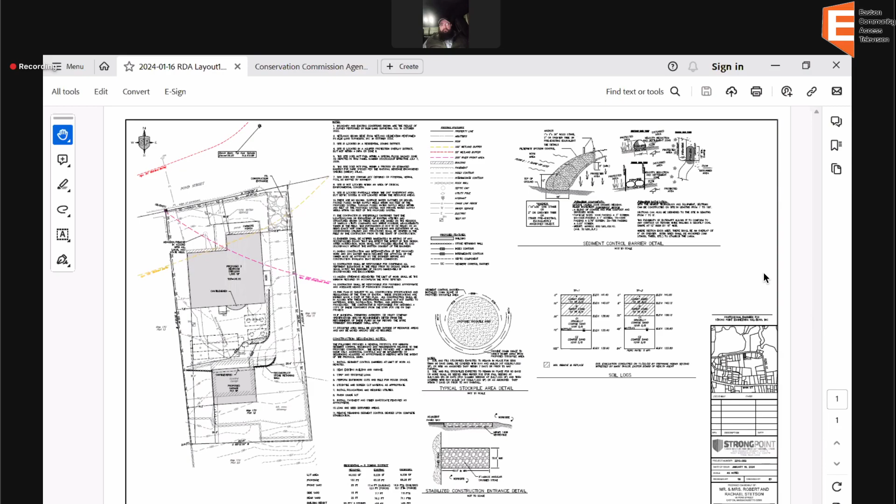While she's doing that, let me just say, for the record, Eric Dias, registered professional engineer, Strong Point Engineering, here tonight representing Robert and Rachel Stetson at 48 Pond Street. This is a pretty straightforward project. It is the tear down and rebuild of an existing single family dwelling on the site. The site is across the street from Shovel Shop Pond. And there is a small tributary stream to the east.

So we do fall within kind of the outer limits of the resource areas, but we are separated from the resource areas by an existing roadway. So we thought in this case, an RDA probably made the most sense here. The existing house will be torn down, foundation removed, new foundation installed, rebuilt in approximately the same footprint. Nothing really changes or gets closer in the front yard.

In the rear yard, in the existing condition, is a shallow cesspool that, as you know, we always try to eliminate because they don't do a great job of protecting groundwater. We are replacing that with a modernized system. I didn't want to say fully compliant because we do have some ZBA relief as far as setbacks to foundations and things like that. But it is a new tank, new pump chamber, new soil absorption field, everything, start to finish. So definitely a benefit there.

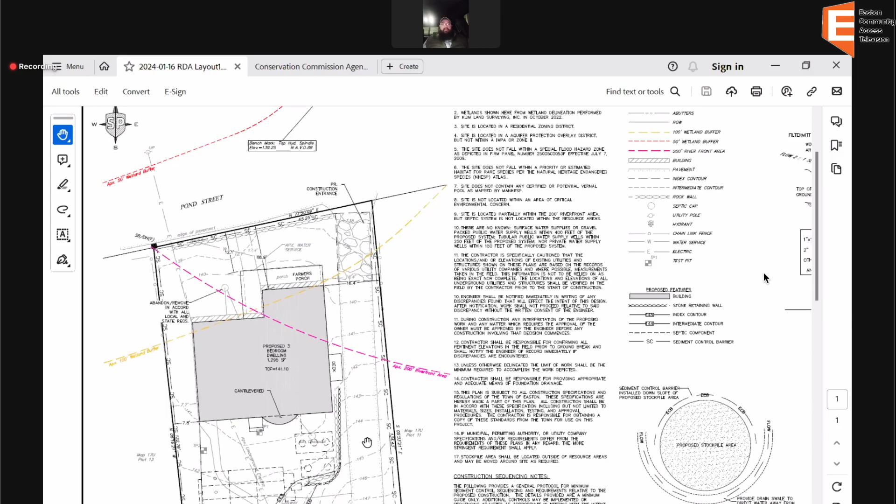Glad to expand any further, but I'll turn it over to you, Mr. Chair. Thank you, Eric. I think a lot of this makes sense.

Jen, any staff comment? My only comment is that the plan does need a surveyor's stamp on it. Yeah, unless - Yes, we can definitely take care of that. Okay, and just submit a finalized plan to the office. Thank you. Sure. Questions from members of the commission on this?

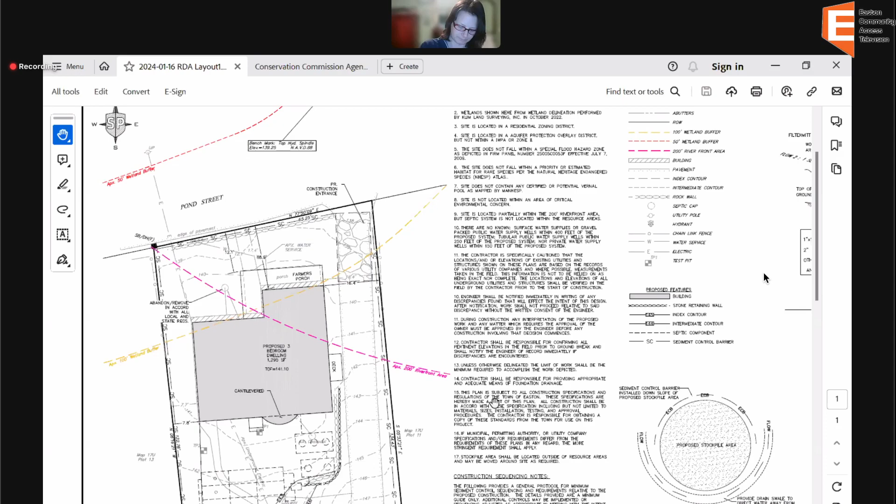I'm good. Eric, I assume you and your client would like to close? Yes, sir, please. Any public comment on 48 Pond Street?

Motion to close the public hearing on 48 Pond Street. Second.

Carol motion, Benson second, roll call vote. Benson, aye. Carol, aye. Spady, aye.

Motion to issue a request for determination of applicability, noting a negative five under the Wetland Protection Act, as well as a negative three and a negative two under the bylaw. Did I get that all, Jen? You did, perfect. Second. Carol motion, Spady second, roll call vote. Benson, aye. Carol, aye. Spady, aye.

Thank you. Thank you all very much. Appreciate it. Thank you.

I guess I'll just head back up here before we move away from public hearings.

Have the applicants for 23 Owl Ridge showed? Yes. Okay, so I'll recall 23 Owl Ridge Road, Lot 1. Notice of intent for the construction of a single-family home.

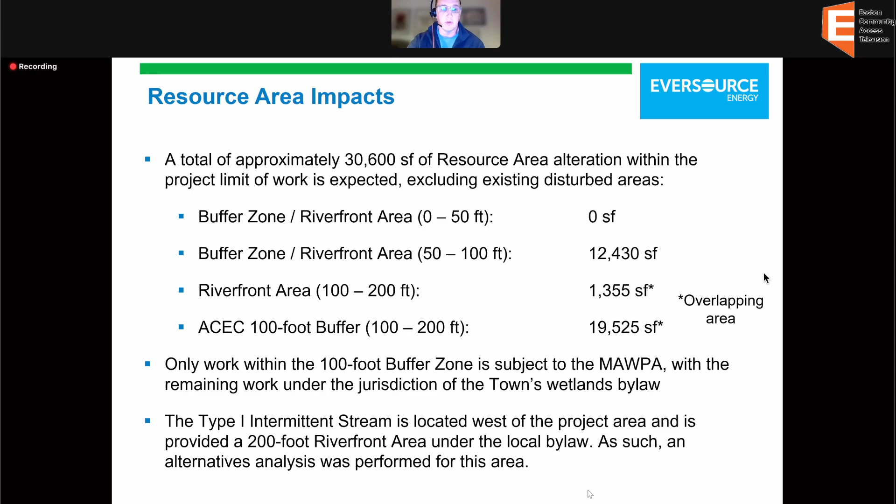This is a quick summary of the overall impacts for the 0 to 100 foot, the 100 to 200 foot, and then the total riverfront area impacts. Some of these impacts occur partially within cleared and grubbed areas and are not in addition to the existing clearing and grubbing impacts that we have.

So stormwater management, that's what I'm going to talk about next. This part of the project has probably the greatest measurable impact on the surrounding wetlands and buffer zones, just because of the improvements we're making as part of this project. The facility was constructed around 1971, at a time when nobody considered stormwater management. Being an industrial site, the facility lacks any sort of formal stormwater management system.

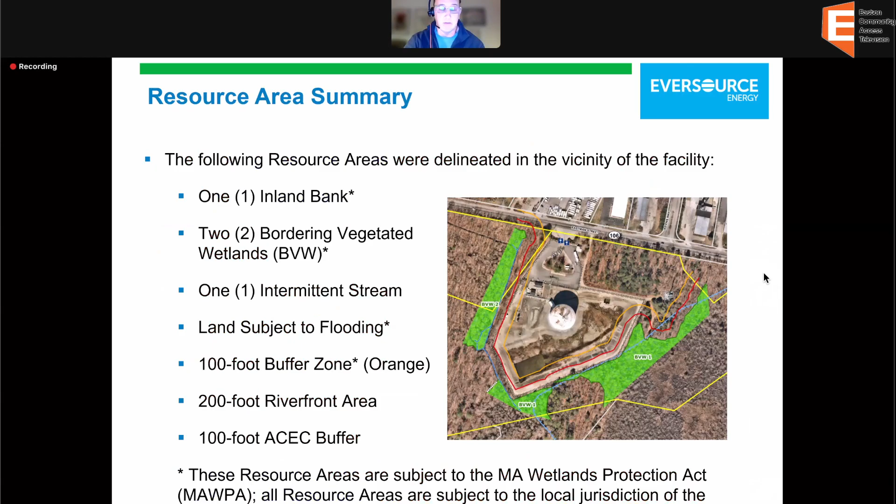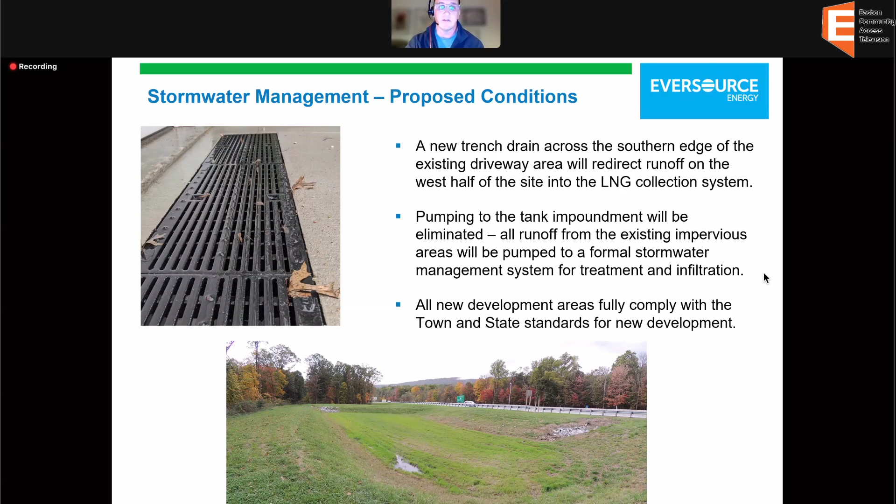The big upgrade for this site is basically the stormwater management improvements we're making. The first one being a new trench drain across the southern edge of the existing driveway area, along this edge here, in front of this building, all the way to the other collection point.

Collecting all of the runoff associated with this paved area - not just the runoff from our project, the electrical building, but all of this existing impervious area that's currently untreated and flows into the wetland. We're collecting it in a trench drain and sending it with the rest of this runoff into this concrete impoundment here.

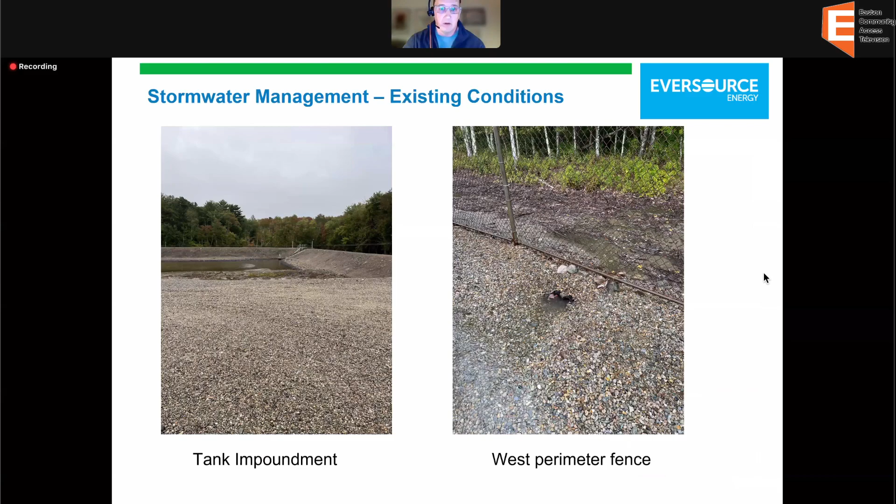The other big upgrade is we're not pumping that out anymore into this tank impoundment. We're no longer pumping any of the stormwater into this area here where it eventually migrates to the low point and gets pumped out.

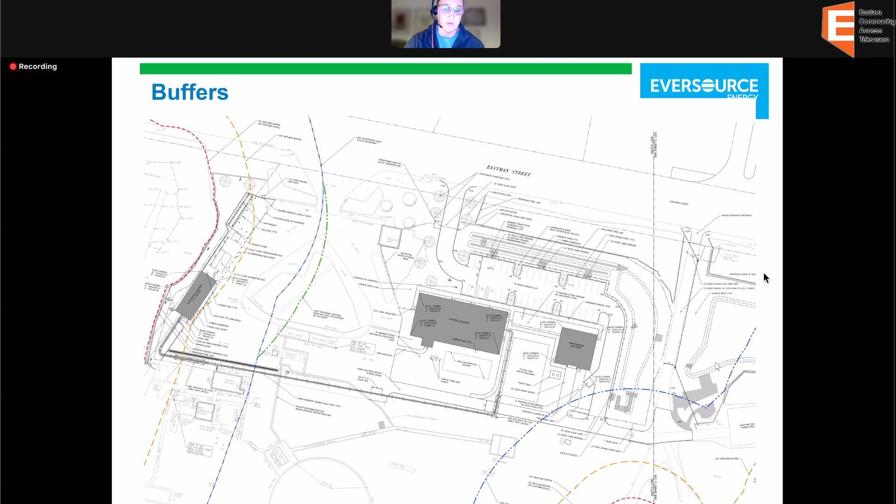We've provided 2 dedicated infiltration basins on the site - the bigger one you can kind of see here. So rather than pump untreated stormwater into the tank impoundment, we're taking that stormwater and pumping it into sediment forebays for pretreatment, then into the infiltration basin for infiltration and treatment. We're actually holding back the 100-year storm in that basin itself.

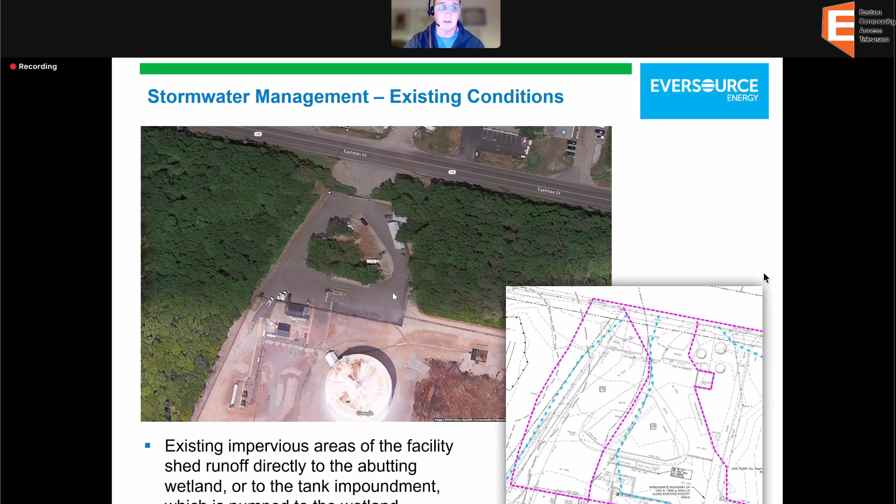So there's no discharges of untreated stormwater going into the wetlands anymore, which is a big upgrade, especially for an industrial site like this. Some numbers real quick: you can see for cubic feet per second, a 49% reduction for the 2-year storm, 45% reduction for the 10-year, and 42% reduction for the 100-year. So that's significant reductions in discharges.

Again, this is just that western half of the site where I was talking about that untreated stormwater - 49% no longer being sent to that area under the 2-year storm.

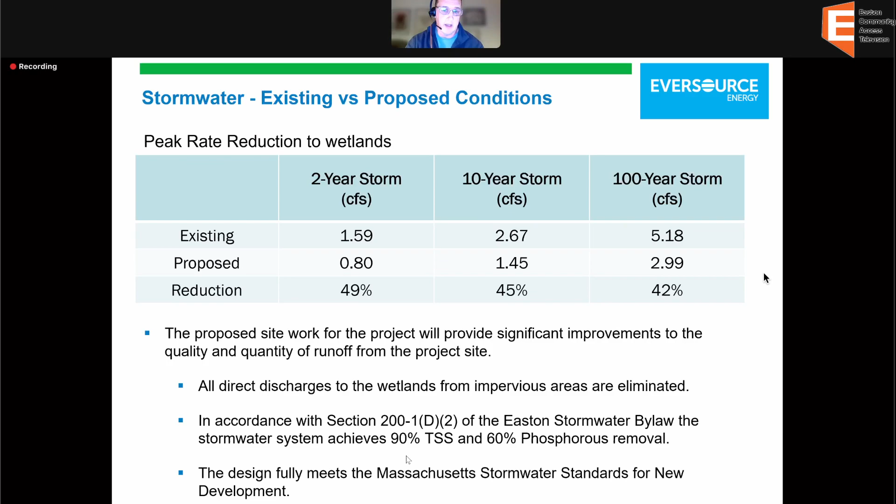The proposed site work will provide significant improvements to the quality and quantity of runoff from the project site. All direct discharges to the wetlands from the impervious areas are completely eliminated, in accordance with section 200-1D2 of the Easton Stormwater Bylaw. The system achieves the 90% TSS and 60% phosphorus removal required under that bylaw, and the design fully meets the Massachusetts stormwater standards for new development.

In summary, the proposed project modernizes the existing LNG facility, ensuring continued reliability of natural gas to utilities in the Easton community. The design of the facility improvements maintains no-disturb buffers and limits new alteration to the least extent practicable. The proposed work will only occur within the buffer zone, wetland, and ACEC and riverfront area, a portion of which is already developed as part of the existing facility.

The stormwater management systems treat the facility runoff on the site while reducing the rate and increasing the quality of runoff into the adjacent buffers. The stormwater design has been peer reviewed and all comments have been addressed. There will be no direct impacts to the wetlands as a result of this project, and the proposed work is not expected to impair habitat functions or water quality of the greater surrounding forested and wetland areas.

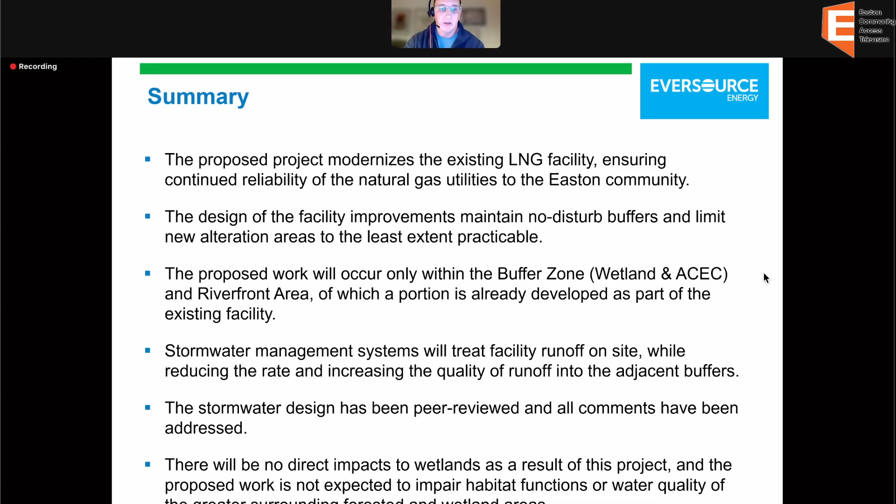And I think that is it. Happy to answer any questions you folks have.

I think the questions we asked last time had a lot to do with the flow of water, and what happens if there's some type of leak in the tank. I think it was explained to us that that's not really how natural gas works, it sort of evaporates upward. Would you mind, since we're here and it's been a while, explaining some of the fail-safes in place in the event there were to be a breach of some kind back there that wouldn't wind up in the infiltration system that you just so well explained to us?

So the biggest thing is the pumps that we're putting into that existing impoundment I was just talking about. They actually have low-level sensors on them, so in the presence of LNG, the pumps won't activate, because if there's LNG mixed in with any of the stormwater, it'll be, say, below 40 degrees or something like that, and the pumps physically won't turn on. That's one of the fail-safes.

The bigger fail-safe that Eversource has as a policy is nobody's allowed to just go out and flick a switch and start a pump. They have an internal policy where before those pumps are activated, whoever's operating the control room that day has to physically go out there, look into the impoundment, make sure there's no LNG, and then they can start the pumps and start the cycle.

You were just talking earlier about the temperature of the LNG - that's probably one of the biggest fail safes. If you breach a tank like this, it's kept at negative 260 degrees. So if that happens, as soon as it comes out, it would come out in the consistency of a slushy, and then as soon as the air hits it, it starts to vaporize immediately.

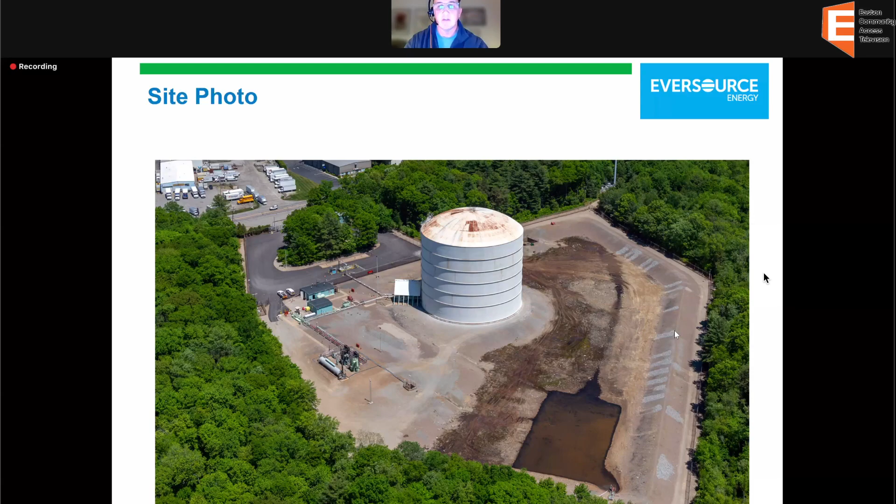So this infiltration basin actually has an under drain in it. In case, worst case scenario, that thing completely fouls and it's not infiltrating water anymore, you can open the valve in this perforated pipe so that it's almost like an emergency drawdown of the basin. You can get the water out of the basin, then repair the bottom. That was one of John's later comments - we talked about the location of that valve.

The other one was some outlet control measures we put in, where we essentially put plunge pools where these pipes come out, so that as the water gets discharged, it hits the plunge pool, the velocity is dissipated, and then it fills up and overtops that plunge pool and trickles into the basin a lot gentler than if it were just coming out of a pipe.

I believe those were the 2 big outstanding issues we had from the last round of peer review comments, but John's been great. We've gone back and forth a number of times with this system and resized it a couple times. We've finessed it, and it's a huge upgrade for an industrial site like this. I've been doing this 14 years, and I've never worked on a site where we've been able to provide a reduction of that amount. A commercial site would be impressive, but from an industrial site like this, to hit those numbers is huge.

That's great, thank you. And I know we received revised plans today. Yeah, I'm just going to make a note that the cover sheet says February 6th, but there are other plans dated later, so if you could put the revised plan date on that cover sheet.

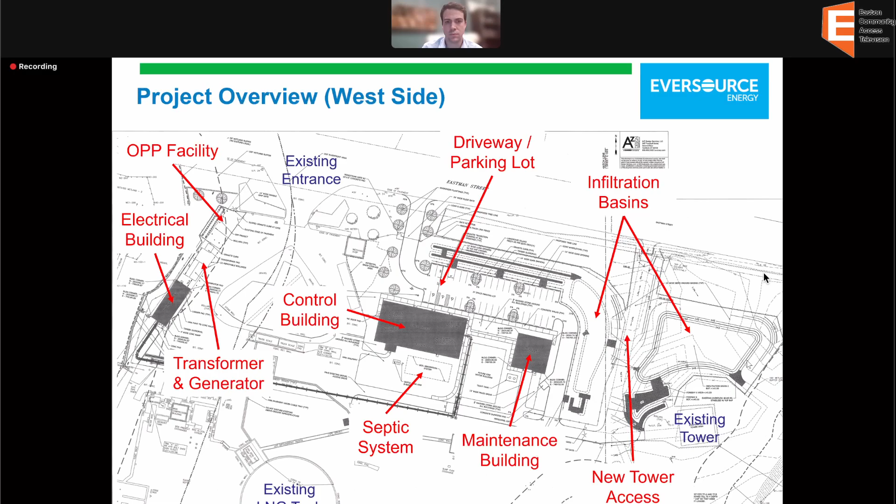Comments from members of the commission? Questions? No, I'm good, that was great. Thank you. Any public comment for 102 Eastman Street?

All right, seeing none, I assume you'd like to close? Yes, please, that would be great.

Motion to close the public hearing for 102 Eastman Street. Spadia, second. Carol motion, Spady second, roll call vote. Benson, aye. Carol, aye. Spadia, aye. Motion to issue an order of conditions and permit for work for 102 Eastman Street.

Benson, second. Carol motion, Benson second, roll call vote. Benson, aye. Carol, aye. Spadia, aye.

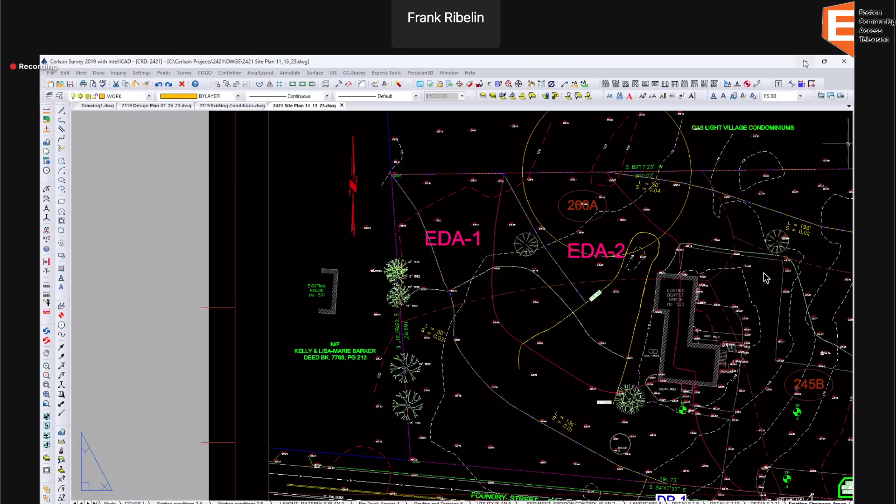Who's sharing this? Yes, do you hear me now? We can hear you, Frank. Yeah, okay, I have the plan on my screen. I'm trying to see if I can get it up to share it with you. We can see something, but do you see the plan? I see a set of plans. I think it might be like a CAD file. Okay, it's not our typical PDF that we see. Okay, let me see if I can get the CAD file, or excuse me, the PDF in front of me.

We're making progress here. We're going to get this done. Thanks, Frank. Yeah.

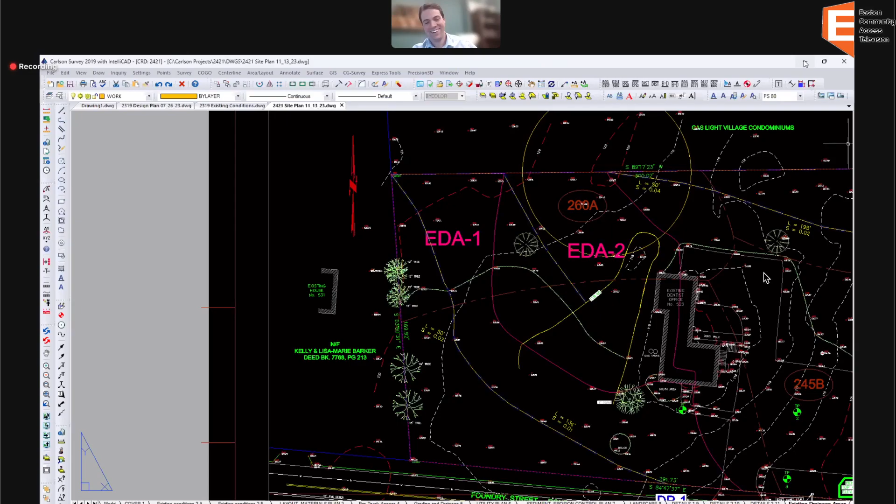This does not, no, that also says Foundry Street on it. Okay, then if it says Foundry Street, that's not the right project. Sorry about that, because the one I'm looking at right now... oh, there you go. Hold on, here we are. All right, got it, thank you.

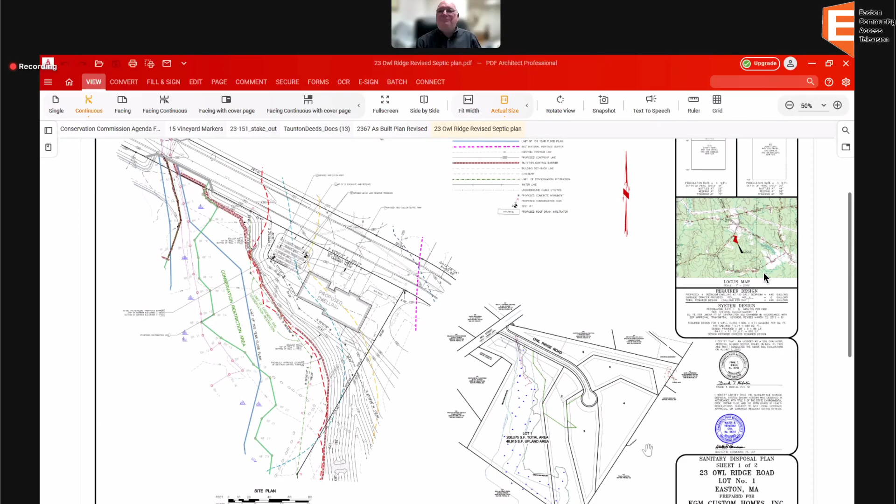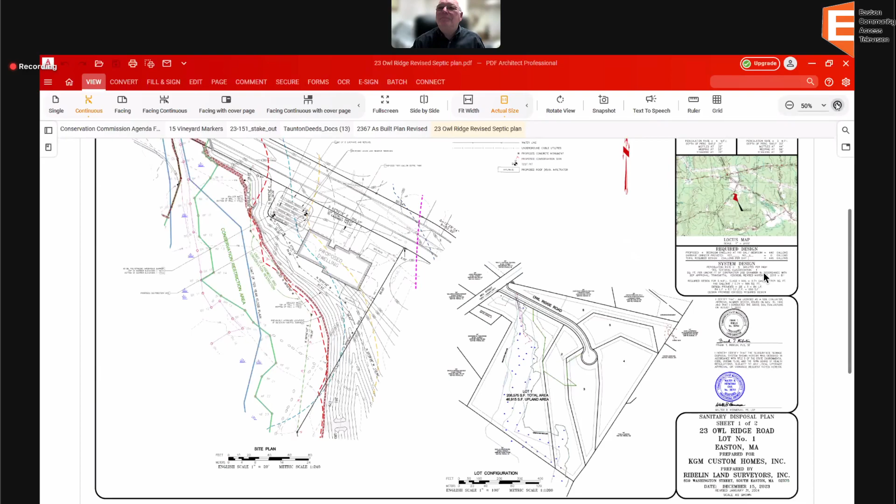Maybe just zoom in a little bit so it's easier to read. That's great, thank you, Frank. Zoom in, if you can. Yeah, all right. Yeah, Garrett can continue.

Okay, so as you can see from the plan... actually I'm pulling up the wrong one on my system, okay, I got the right one. With the house, the wastewater system, leaching field, is located to the upper left-hand side of the plan there on the lot. And then going across from left to right, on the right side of the house, you will see infiltrate.

That is the location of the Cultec chambers for the front side of the house. So if you look further to the south, down towards the lower right-hand corner of the house, you will see a separate unit that says, separate area, rectangle, infiltrate. Those are the other Cultec chambers. So we have those two for this dwelling.

So basically, those are the areas where we would infiltrate the stormwater. The driveway is not included, but when we had the previous notice of intent for the subdivision, neither the driveway nor the roof area were being infiltrated. So this is the improvement from the previous notice of intent. We are now actually picking up the entire roof area and infiltrating it. That's the difference from the old notice of intent to the current one.

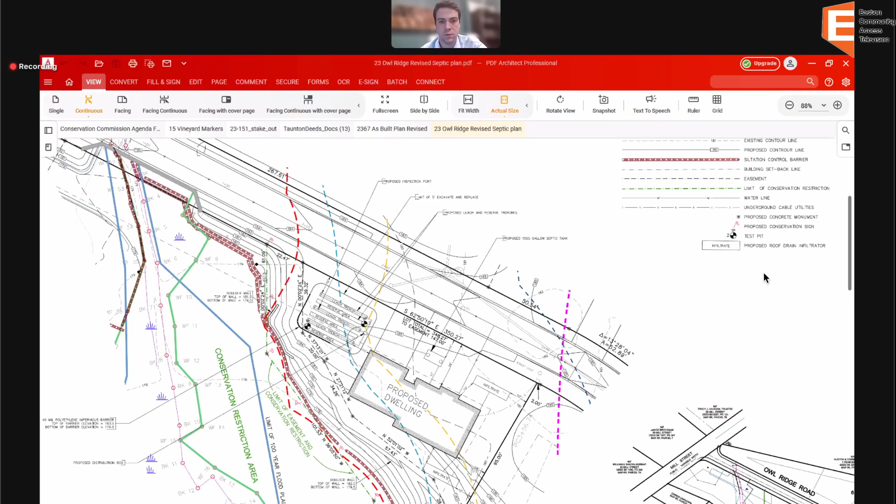Questions from commissioners? Seeing none, any questions from members of the public regarding 23 Owl Ridge Road, Lot 1? Seeing none again, Garrett, I assume you'd like to close.

Yes, please. Motion to close public hearing on 23 Owl Ridge Road, Lot 1, notice of intent. Any second? Carol motion, Spady second, roll call vote. Benson, aye. Carol, aye. Spady, aye.

Motion to issue order of conditions and permit for work for 23 Owl Ridge Road, Lot 1, notice of intent. Second. Carol motion, Benson second, roll call vote. Benson, aye. Carol, aye. Spady, aye.

Now, turning to our next one, Garrett, 29 Owl Ridge Road, Lot 2. Any chance we could put those plans up? Is Frank still there? Frank's still here. Let me see if I can pull those up. Thank you, Frank.

Garrett, while Frank does that, will you just tell us what, if anything, is different here? Yes, so basically this notice of intent is similar to the last, same thing. It's an administrative notice of intent. This was all covered under the subdivision previously. The only change is that the square footage of the roof, again, has increased slightly. It's changed from 2,016 square feet under the previous subdivision notice of intent, increased to 2,100 square feet under this notice of intent, which is approximately a change of 84 additional square feet.

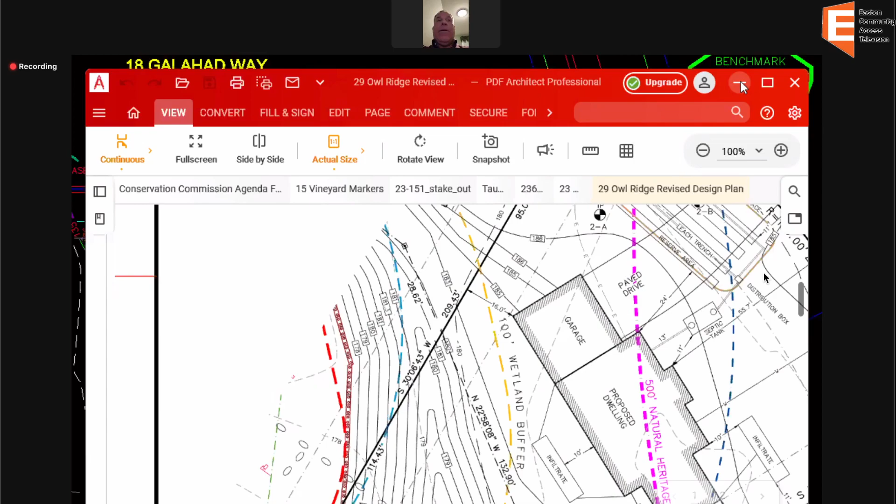I know I'd ideally like to show the plan. Looks like, oh wait, I think we might have made some progress. Get it up there finally. Whoop. That looks like it. Now just make sure you go to the resource areas too, please.

So, Garrett, can you just identify the resource areas and the infiltration basins for us?

Yes, so basically, if you look towards the rear of the house, you'll see Frank has created the yellow dashed line. That is the 100-foot wetland buffer. And if you look further to the right, on the opposite side of the house, you'll see a blue dashed line. That is the 200-foot local riverfront area.

Now again, the area has been mitigated for when we filed the subdivision notice of intent in regards to working in the riverfront. We included all that mitigation for this work in that notice of intent, all the ecological restoration areas, wetland. We did a lot of the stormwater mitigation to make improvements, betterments.

So basically here for the additional 84 square feet of the roof and the 642 square feet of the driveway, you'll see an infiltrator unit on the eastern side of the house. That's on the right-hand side in the front of the house.

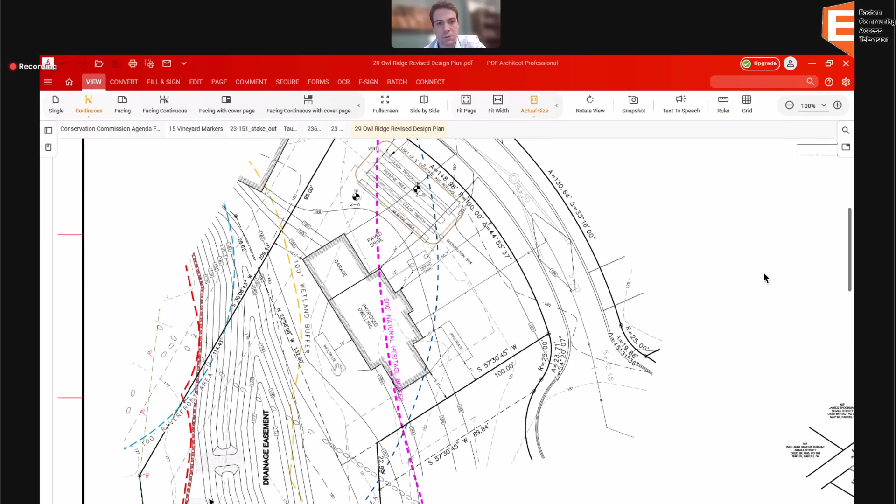Okay. Having now seen the plans, any questions or comments from members of the commission? Having now seen the plans, any questions or comments from members of the public?

Garrett, I assume you'd like to close on this one. Yes, please. Motion to close the public hearing on 29 Owl Ridge Road, Lot 2.

Benson, second. Carol motion, Benson second, roll call vote. Benson, aye. Carol, aye. Spady, aye.

Motion to issue a permit for work and order of conditions for 29 Owl Ridge, Lot 2. Spady, second. Carol motion, Spady second, roll call vote. Benson, aye. Carol, aye. Spady, aye.

Thank you. Thank you very much. Everyone have a good evening.

You too, thanks. So turning back to continued hearings and possible deliberations, calling the next order of business, Washington Street, Mass DOT Highway Division application, notice of intent for road improvements on Washington Street from Dickerman Road to Elm Street.

Hello, first off, can everybody hear me? We can hear you, we can see you. Okay, sounds great. So for the record, my name is Matt Crowley.

I am a professional engineer with Beta Group. We have a few other folks with me here tonight on the call. The first is Darshan Javeri, he is Beta's project manager. We also have Corey Beckwith, who is MassDOT's environmental representative. It's my understanding she may be having some technical difficulties, so we'll see if she can actually participate if needed. And we also have Tyler Drew, Beta's staff scientist.

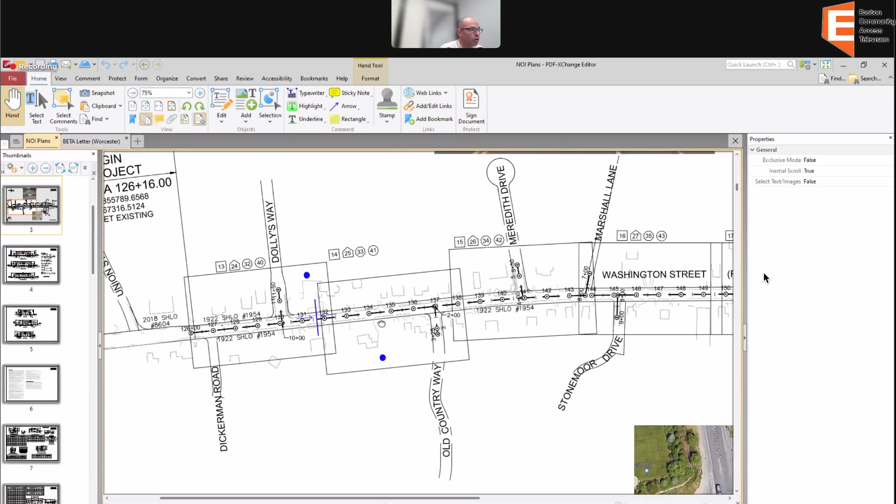So, all right, I'd like to start off with a description of the overall project and then get into a little more detail regarding stormwater and some wetlands. So this is primarily a roadway improvement project along Washington Street, which is under MassDOT jurisdiction. The project begins just north of Dickerman Road on Washington Street and goes about 3/4 of a mile to the south, ending about 600 feet south of the intersection of Elm Street.

The project also includes about 100 feet of Elm Street to the east of the intersection of Washington Street, and about another 600 feet to the west of the intersection, extending just beyond Frothingham Drive. So work on Washington Street primarily consists of adding sidewalks to both sides of the roadway and modifying the cross-section to provide bike lanes, which is part of MassDOT's healthy transportation policy.

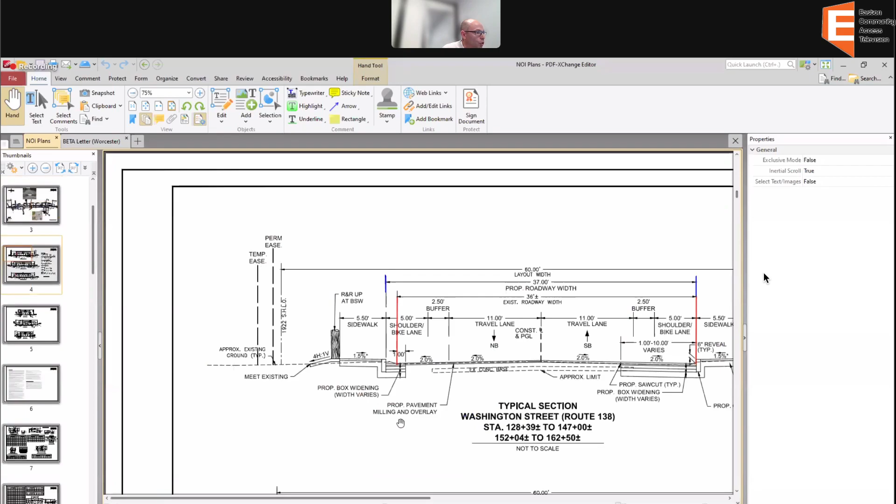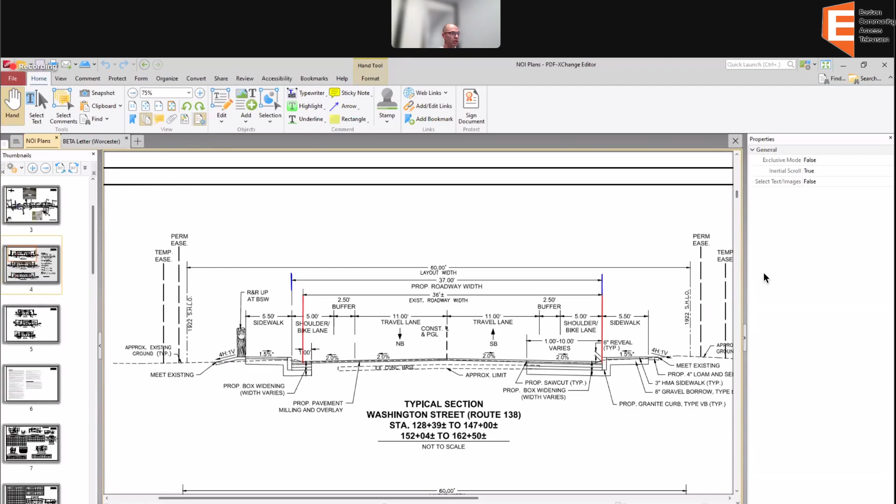Just to give you a little bit of a look of how that compares with the existing and proposed conditions, this is a typical section, which represents about 75% of Washington Street. The red lines here are just to show the existing roadway width, and the blue lines above show what the proposed roadway width is going to be. Really, the cross section is very similar, a little bit of widening, but obviously we are adding sidewalks on both sides of the roadway where none exist today.

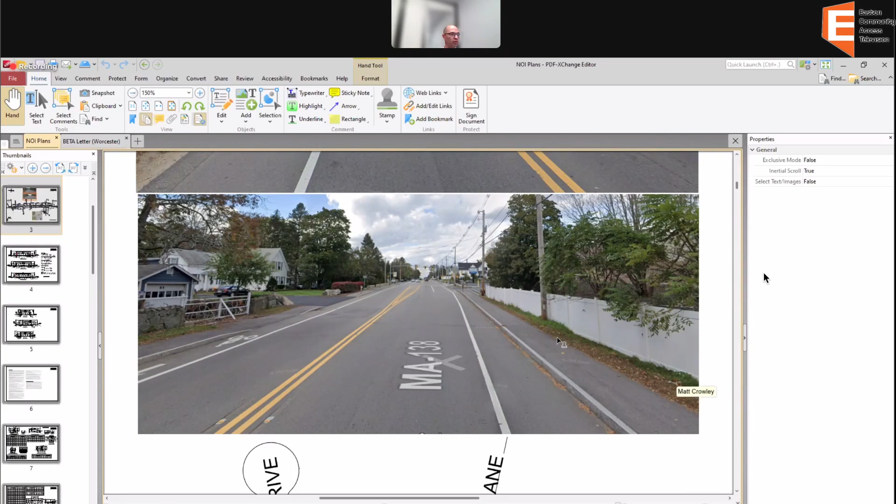Obviously, you can see there's no sidewalks on the roadway. And if we spin 180 degrees and look in the opposite direction, this is the project that was completed previously. Dickerman Lane would again be to our rear, but now we're looking to the north. There's sidewalks on both sides of the roadway, and there's bike lanes out here.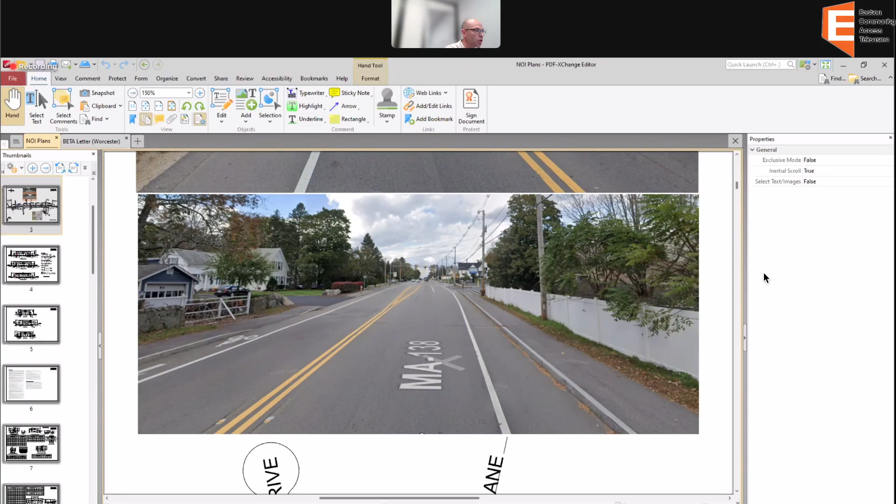What will be a little different about this project is it's actually going to be a buffered bike lane. You'll have a 2.5 foot buffer between the traffic and the bike lane itself, and that is going to look more or less like this. This is the typical layout: bike lane, 2.5 foot buffer, 11 foot travel lane, and essentially the same thing on the opposite side.

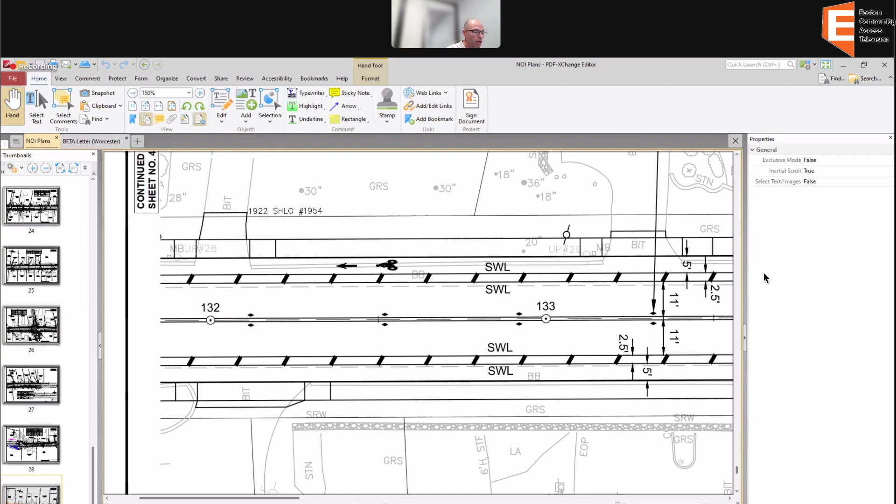Additional work along Washington Street also includes the intersection with Elm Street. So this is the intersection with Elm Street here. Currently this intersection is under stop control. Here is an aerial photo to give a better picture. As you can see, the east and westerly legs are not lined up with each other. It's a substandard intersection with a higher than normal crash rate.

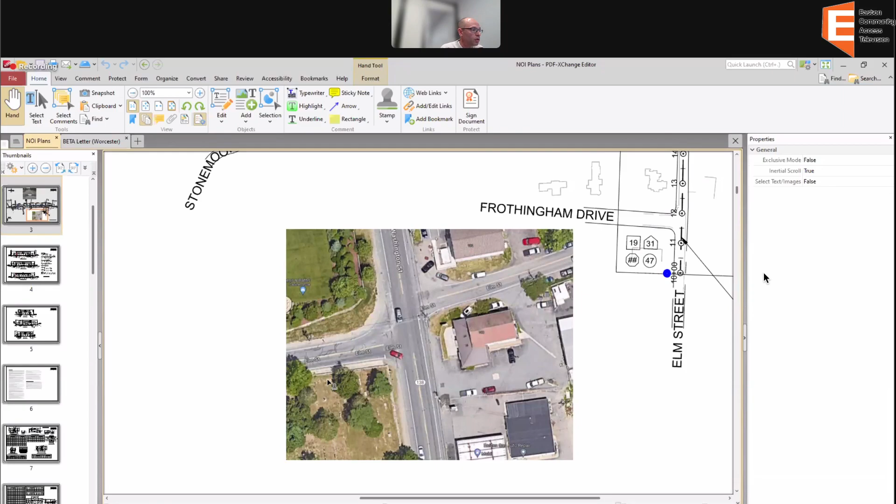So what is proposed is to signalize the intersection as well as realign the western leg of Elm Street so it lines up with the eastern leg, and add some turning lanes for safety improvements. I can show you what that'll look like in the final condition here.

So as you can see, Elm Street now lines up. You have turning lanes on 3 of the 4 legs. These blue lines just represent the existing curb line out there, just to give a sense of how the intersection is being modified.

So that is the general overview of the roadway work. Obviously, there'll be new signing and striping, ADA compliant ramps throughout the corridor, and some accessory utility improvements like upgrading some of the outdated fire hydrants out there.

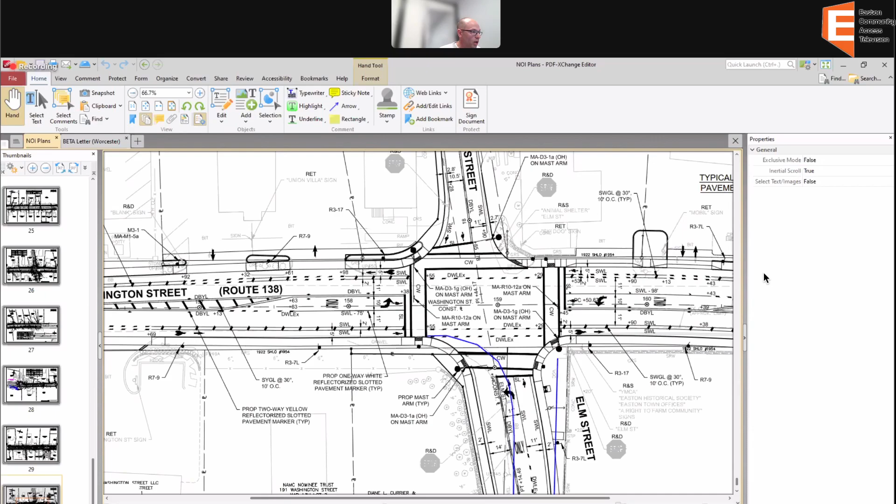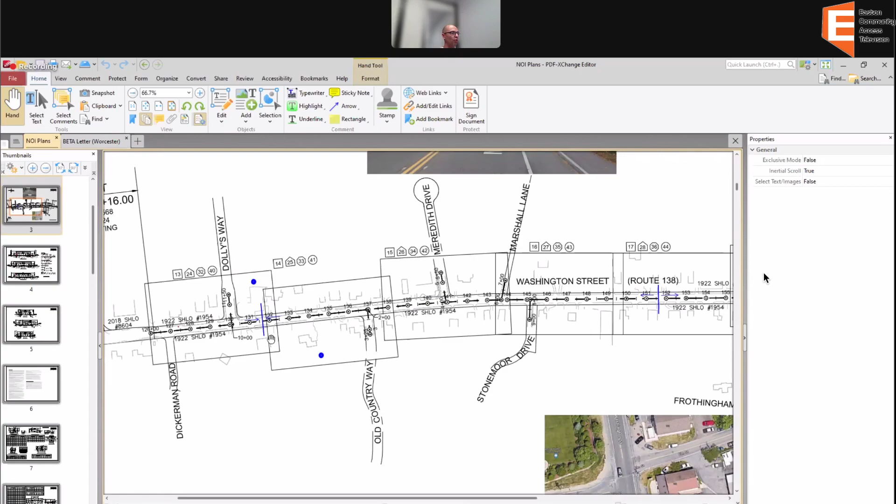Next, I'd like to give a little overview of the stormwater on the project. Along the corridor, there is one low point, just to the south of Dolly's Way, and one high point, located about midpoint between Stonemoor Drive and Elm Street.

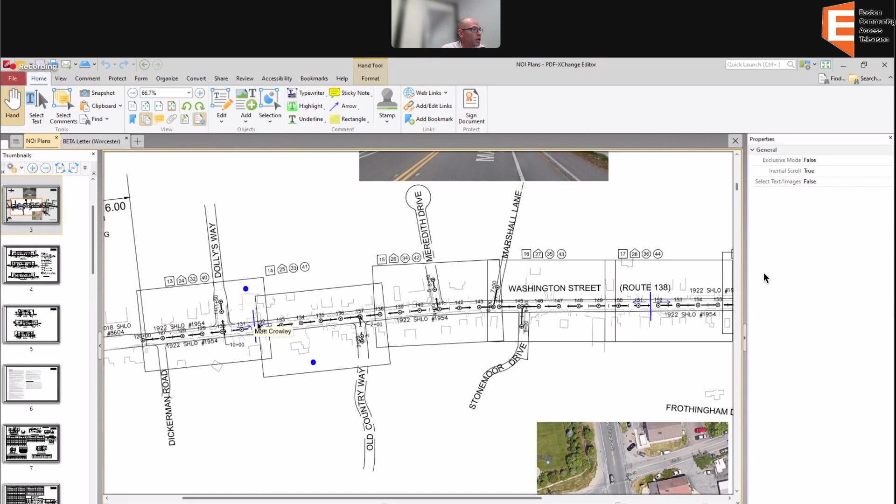There are 4 discharge locations from the project, marked with blue dots on the plan here. I'll show the project plans in a second to give more detail, but the first one is near the low point of the roadway, just south of Dolly's Way. About 300 feet further south, there's another outfall on the west side of the project. Near the southerly project limits, the project terminates, however the drainage system continues on, so that's our discharge location. And then there's a 4th location just beyond Frothingham Drive.

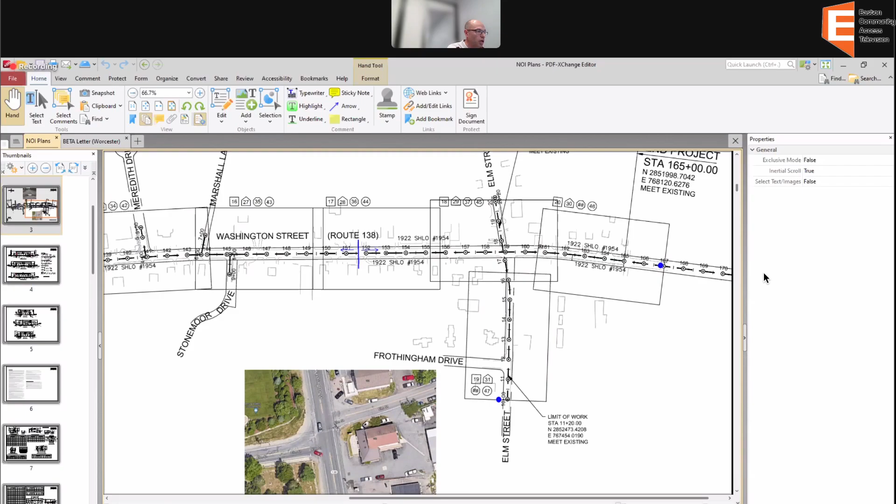To give a better picture of what's happening at each location: again, this is Dolly's Way, the low point of the roadway. There's an existing outfall through a drainage easement today. It carries flow from both the project area and portions of the roadway to the north that are outside of the project. The pipe system is currently undersized and is going to be upgraded to accommodate the 10-year design storm.

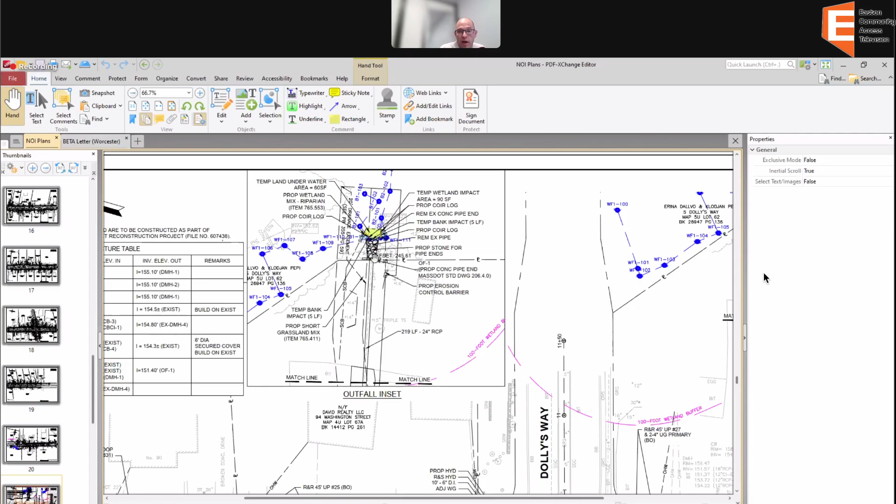We've provided a match line here. This travels across a private parcel and eventually to an existing outfall to a wetland resource area. The current outfall is underwater, and what we're proposing is to raise the outfall by about a foot to get it out of the water, and also pull it back to provide some scour protection, which does not exist today.

On the next sheet, we have a very similar situation, except it's discharging to the west side of the roadway instead of the east side. Again, traveling across a private parcel through a drainage easement and discharging to a resource area. Again, pulling the outfall back and adding scour protection.

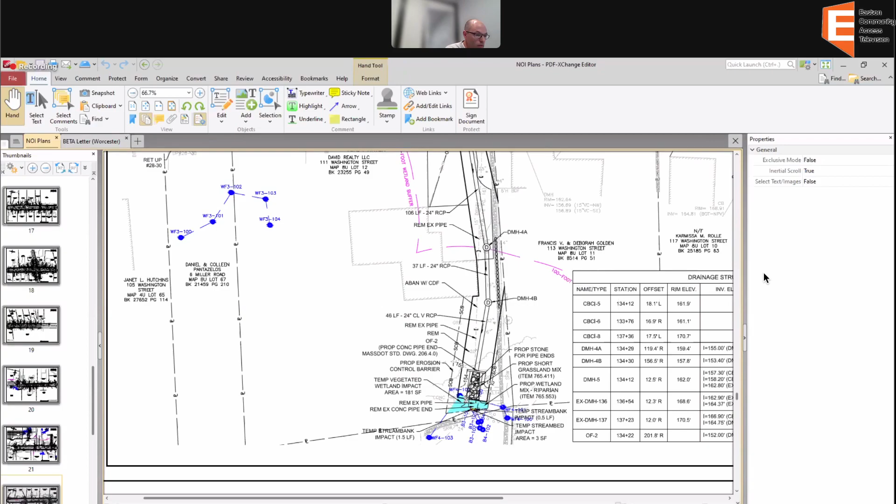This is the southerly project limits here, where we are just matching into the existing system, and essentially stormwater is going to go where it goes today. That's beyond the project limits. Upgrades to that system would typically take place on a future roadway project proposed adjacent to the existing outfall.

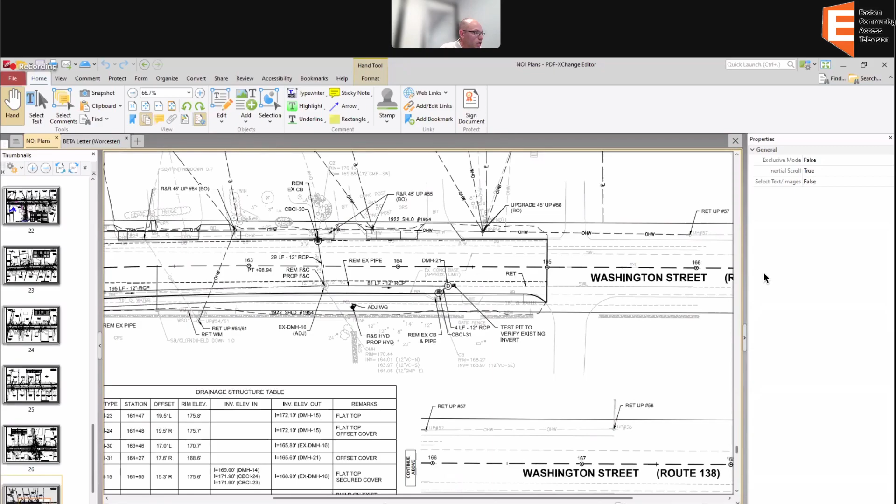And lastly, we have an outfall just to the west of Frothingham Drive, over in this location here, just beyond the project limits. So regarding stormwater, the project does have some fairly significant constraints that limit opportunities for improvements.

Most notably is a very limited right-of-way and the proximity of both private residential and commercial features adjacent to the roadway. There's also some water infrastructure that trails along the curb lines on both sides of the roadway, primarily along Washington Street. And there's also a concrete base located throughout Washington Street as well.

So despite these restrictions, the project is proposing to install new deep sump catch basins throughout the project corridor, which will provide some treatment that does not exist today.

We have received comments from your agent as part of the staff report. We have engaged in some preliminary discussions to resolve some of those concerns addressed in there. And it's also our understanding that you are going to have the project peer reviewed, and we are going to get a package out to the peer reviewer later this week for them to take a look at. And obviously we'll work with them to resolve any comments.

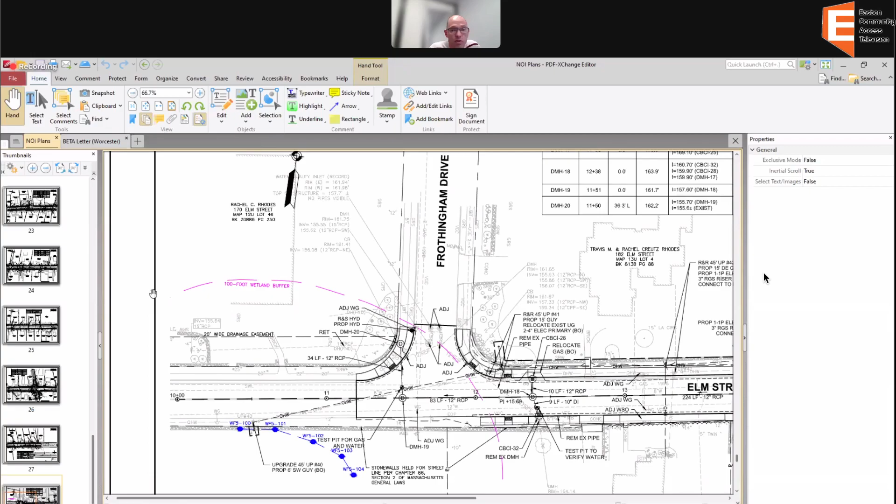So at this time, I'd like to turn it over to Tyler Drew, staff scientist, who can give a little insight about the temporary wetland impacts on the project.

Sure. Hi, everyone, Tyler Drew. I'm on the permitting department for this project. So I'll give a brief overview of the impacts. This project is proposing 12 feet of temporary impact to bank, 271 square feet of temporary BVW impact, and 63 square feet of temporary land underwater impact.

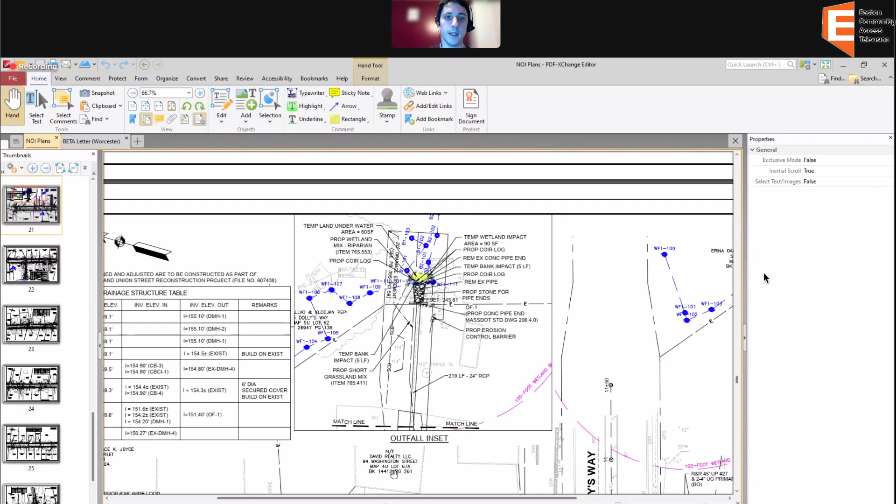So impacts are associated with replacement of both of the outfalls just shown. This is the first one here. Impacts will be associated with removing the outfall from its current location, backing it up, installing riprap stone, and all impacts are proposed to be temporary, associated with dewatering, construction access, and removing the structures themselves.

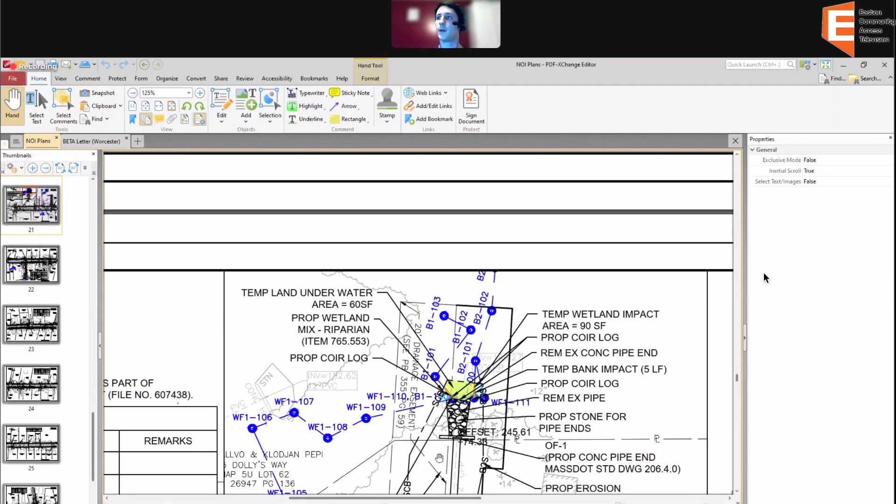In this case, there is 60 square feet of land underwater impact, 90 square feet of BVW impact, and 10 feet of bank impact, again all temporary. They're proposing riprap stone to add some stormwater treatment before it discharges into the stream and the wetland there, and some stabilization of the slopes along that existing stream. You can go to the next one.

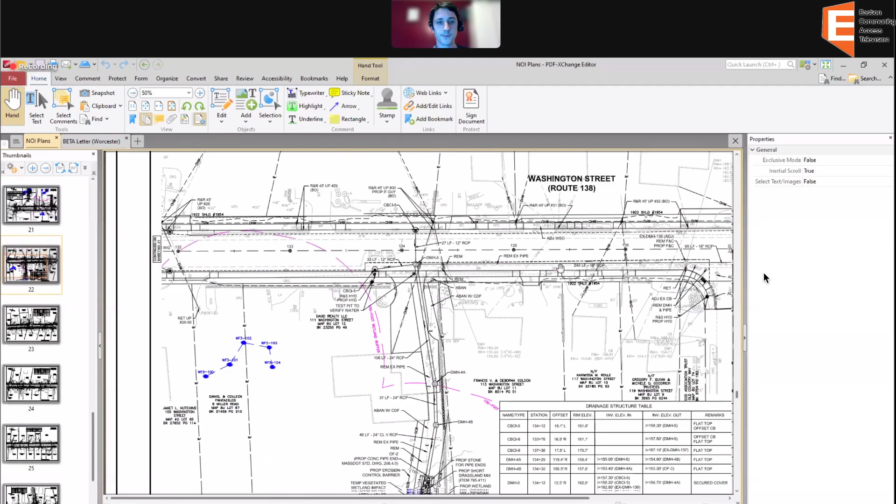Thank you. So at this location, it's the same thing. They're proposing to remove the outfall and back it up to provide some additional room for treatment of stormwater. In this area, it's 181 square feet of BVW impact, again all temporary, 3 square feet of land underwater impact, and 2 feet of bank impact.

So they're proposing to remove the structure and then provide 15 feet or so of space between the BVW boundary and the proposed outfall to install riprap stone to provide additional treatment. And I believe that's all. Yes, those are all the temporary impacts that we have. So thank you, Tyler.

I think at this point, we'd like to turn it over to the commission to answer any questions or hear some commentary they may have on the project.

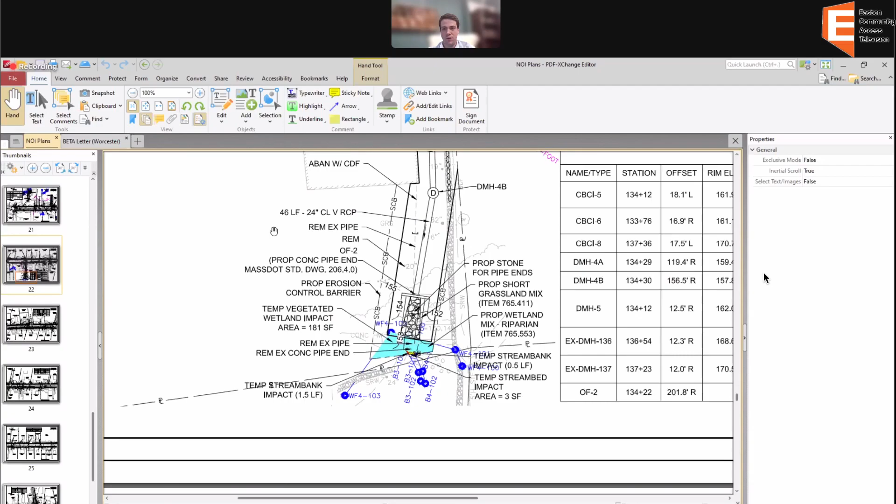Thank you. I found it to be a very in-depth and concise presentation. I think my biggest concern is just stormwater management, and I'm not the person who has a whole lot of say in what is and isn't an appropriate design. So I think getting peer review done would be very helpful to myself as a member of the commission, and probably my peers here. But I think on its face, this is something that's very much needed in that area. I drive that way and take a left on Elm Street pretty much every day. And I'm very much looking forward to hopefully having a traffic light there at some point.

Jennifer, any staff comment that you think we ought to address here? There's no doubt that it is an important project that is needed, but we do need to make sure that they have proven that they will not negatively impact the wetlands or the abutters. So we do have a number of comments for them to address, and we've done a Zoom meeting, at least one, right? We do have a peer reviewer who's already been retained. As soon as he gets the packet, he can start going through the package. I've done a site inspection, and we'll have additional comments from that site inspection for all of you.

And yeah, my only other question was whether you sent the packet out to John yet, but you answered that question. Perfect.

Maybe just say the two addresses where those outfalls are, because that does fall onto private property. Okay, that would be helpful. So one of them is 111 Washington Street. And there is 108 Washington Street. Okay, and the address for Elm Street.

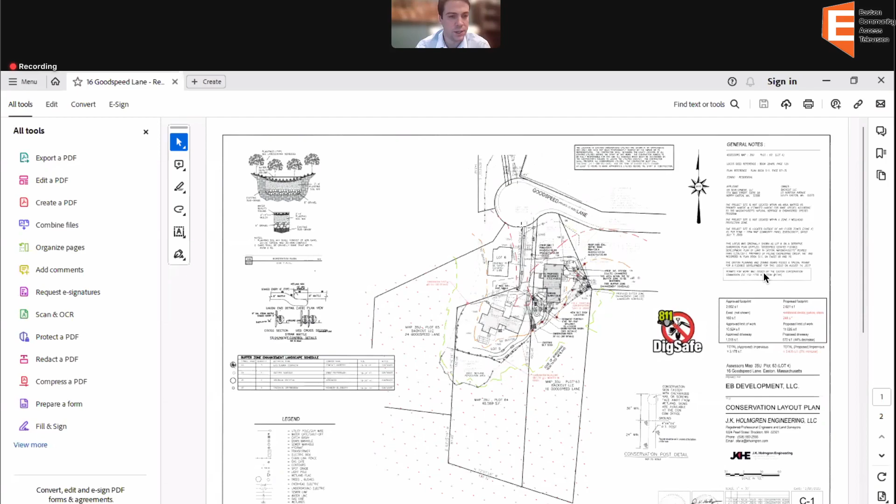Could you put your hand up there and just show us the approved limit of work and the proposed limit of work? Can you see that, or no? Not yet. Okay, hold on a sec. Can you see it now? We can see it. Okay, could you just zoom in? Yeah, let me go to sheet 2, that's a better blow up of it. So the area I was talking about is just south of the garage, you can see where it says steps. Yep, that was the area of the most recent change.

Looking at the two... Jennifer, we have new outstandings to point out to us. Scott's going to point that out to us. Okay. Anytime you're ready, Scott. I'm sorry, I missed the question. What was the question? Point out the approved limit of work with the proposed limit of work, please.

If you can see, obviously the wetland line is in green, the 50-foot buffer is in orange. So right next to the 50-foot buffer in the backyard, those areas where the posts are shown indicates the area that was approved last time. And mistakenly, I had pushed that a little bit further in towards the wetland, so that was readjusted to what was approved previously.

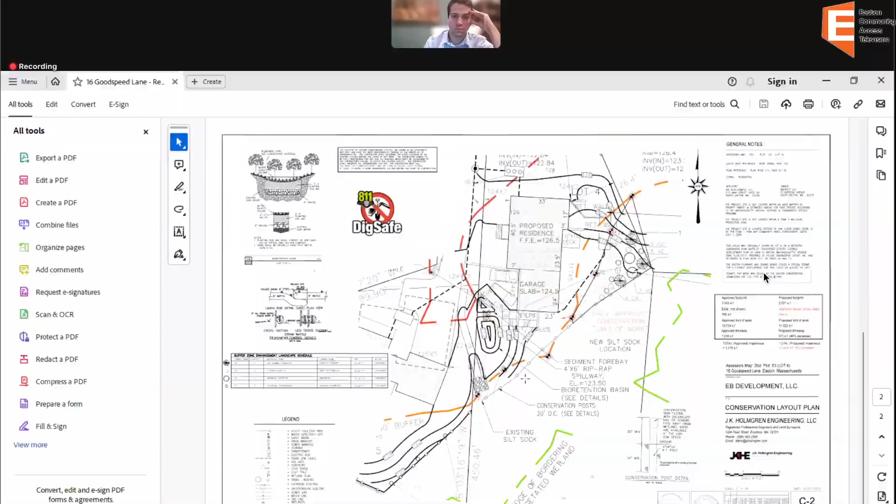Motion to approve a request for amendment. Oh, thank you, Jennifer. Scott, I assume you'd like to close. Absolutely, thank you - motion to close the public hearing on 16 Goodspeed Lane. Benson second, Carol motion, Benson second, roll call vote: Benson aye, Carol aye, Speedy aye.

Motion to approve the request for amendment for 16 Goodspeed Lane, noting our conversation about the buffer zone change, and reflecting that the final set of plans will be further reviewed by the applicant and by our agent. Thank you. Speedy second. Carol motion, Speedy second, roll call vote: Benson aye, Carol aye, Speedy aye.

Thank you, Scott, very much. Have a good night. You too. You too.

Next up is a request for extension. We'll begin with 9 Reardon Way, also known as 82R Lincoln Street, EB Development. Applicant's Collins Civil Engineering - request for extension of an order of conditions to construct a single-family home.